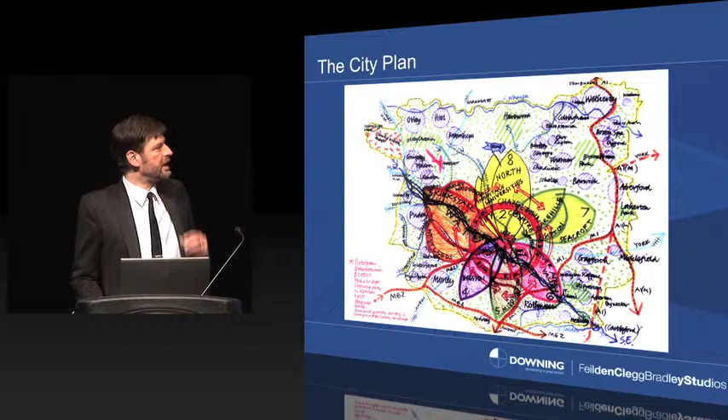This is the site for Broadcasting Place, and I think the title of this talk is about changing context for tall buildings. This is a very specific listed and conservation area context on the edge of the city centre in Leeds, which is a city of 750,000 people in the north of England, primarily a Victorian city. In terms of transition from the city centre to the outer edges of the city, this is a diagram done by Koetter Kim and the city architect, talking about a central ring which envelops the city, making a transition from the city centre to the outer and inner suburbs. And I think one of the things that this building tries to do is to make a jump between inner city and outer city and begin to connect them together.

This is the site itself. The university is up on the left-hand side to the north. And as you can see, this large area of urban motorway has come through and really transformed the city centre, creating a very strong barrier. Part of our project, which was to move what was a former BBC studio site on, was actually to reconnect bits of the city and use this project to combine the tall building and lower buildings around there to stitch the city together again.

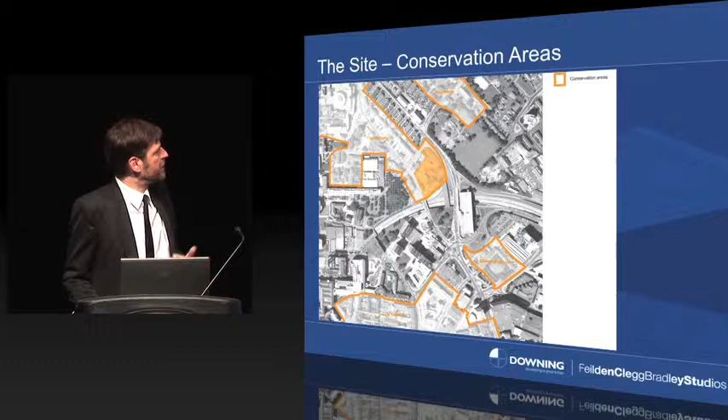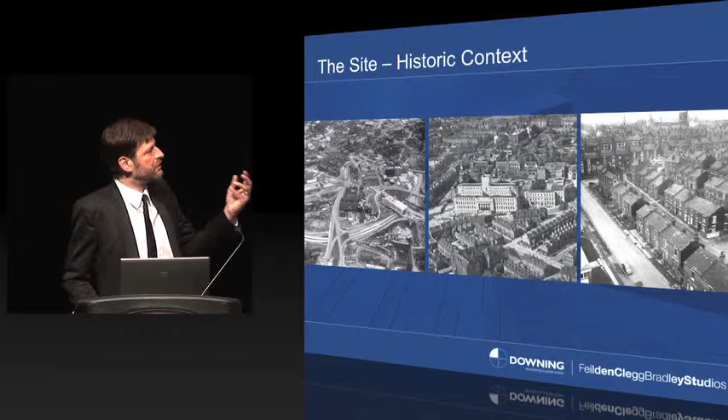The site itself shows a series of conservation areas, a very tricky site in terms of its listed building status. And as you can see, its evolution through time: the urban motorways coming through, the development of new, very striking university buildings, and a context of very dark and dense row housing from the Victorian era. And the city itself - this is the City Hall, which a group of Italian architects visited once and asked if they could find out where the black stone came from. This is also a view up the main road at Woodhouse Lane, looking towards the complete contrast, which is a white Portland stone building. So a city actually almost comprised of these quite intense, big Victorian urban buildings.

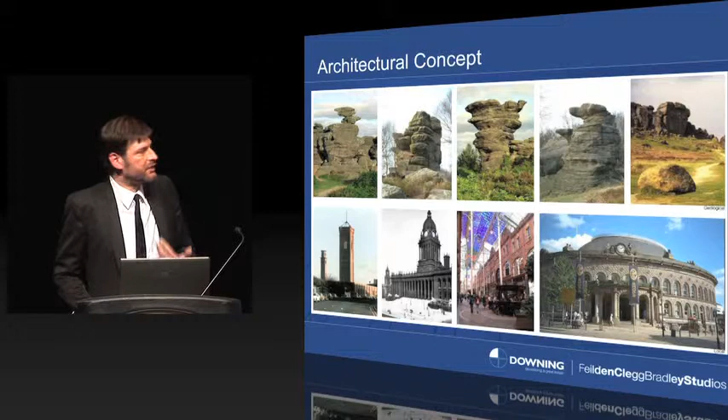Also, I think from my point of view, looking at this from a local context as a local Leeds lad, trying to bring a specificity to the building. This is some surrounding local landscape from the local hills, and also, again, this context of the Victorian architecture, where taking commercial and creating the civic was something that was very foremost in their minds. And as was mentioned earlier, this building was the site for the development of one of the first moving pictures by a French filmmaker called Louis Le Prince. And I think we were very keen to bring a sort of lightness to an otherwise very big sculptural building.

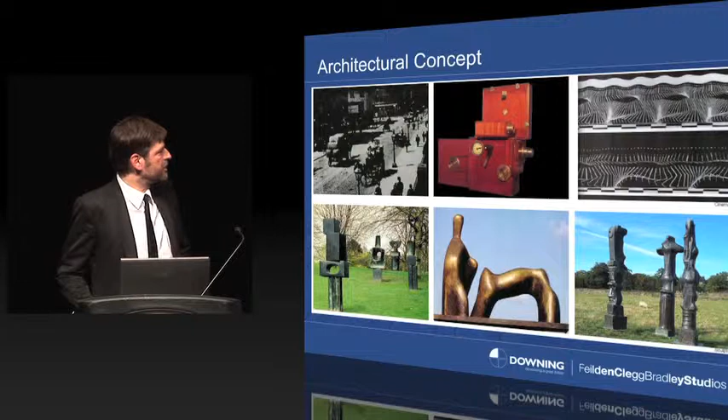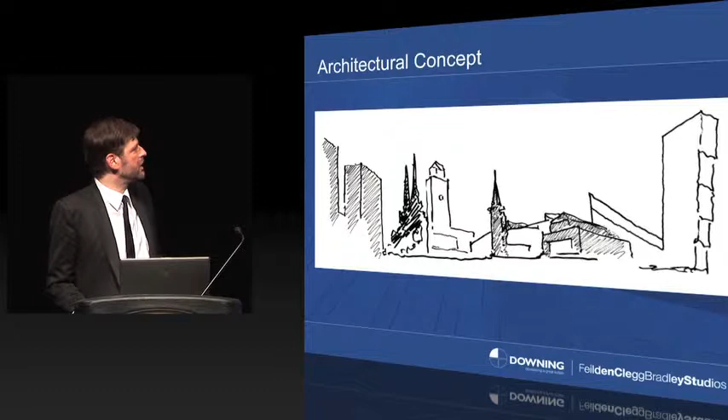Some sculptures by local artists Henry Moore and Barbara Hepworth at the base there. So just developing the basic conceptual approach, we tried to build sensitively but tall relative to these listed buildings, to preserve and frame this view that had been established up Woodhouse Lane, and to begin to bring some of those landscape metaphors into the building to create something which was almost a piece of landscape within the city itself.

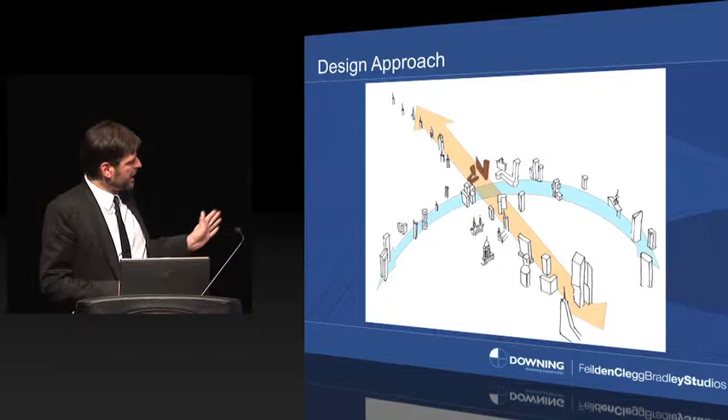This was a quick sketch to help formulate the city's tall buildings policy, where we framed our site as the nodal point at the top of a high brow hill, coming up from the centre of the city, going out towards the edge of the city with a sequence of churches, and then bringing a very large arc around the existing main urban ring road.

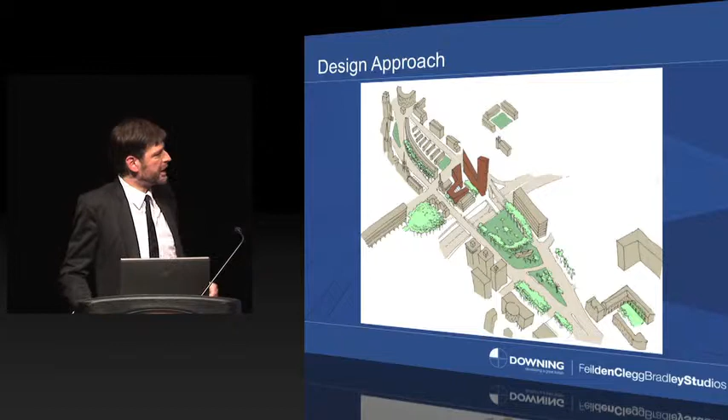But then moving closer into the site, you begin to see the setting of the building relative to open space and some of the larger urban gestures of the existing Metropolitan University and the university further up.

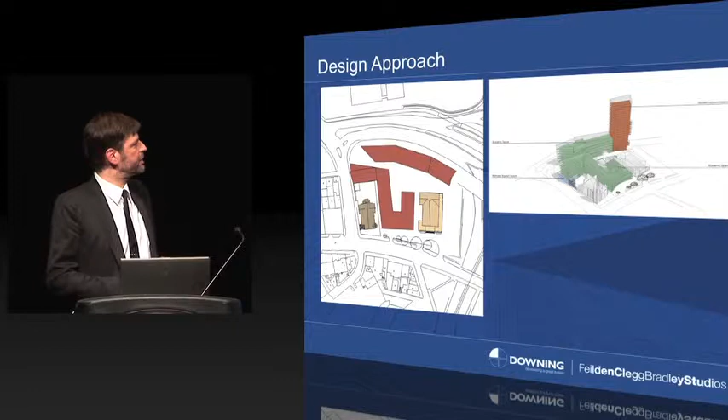Also to create a very simple and straightforward site organisation about bringing people back through a site that had been closed off for the last 40 or 50 years, and to create a sense of place, but a sense of different contrast of spatial experience, reconnecting the city together.

This was the base site plan, where you can begin to see the urban motorway to the bottom, and then a sequence of routes and courts running through between these very densely packed buildings.

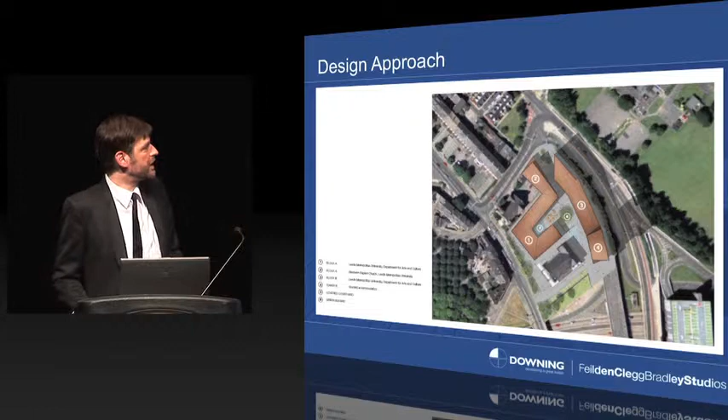The other main use on this site is actually the Faculty of Arts and Society, as Chris Bailey described in the film, and how to integrate a new arts building with student residential accommodation to create a very intense mixed-use experience. Also bringing an architectural language from the city into a residential area and an academic area to the north, and creating a building that was striking, modern and purposeful, yet at the same time quite responsive to its context.

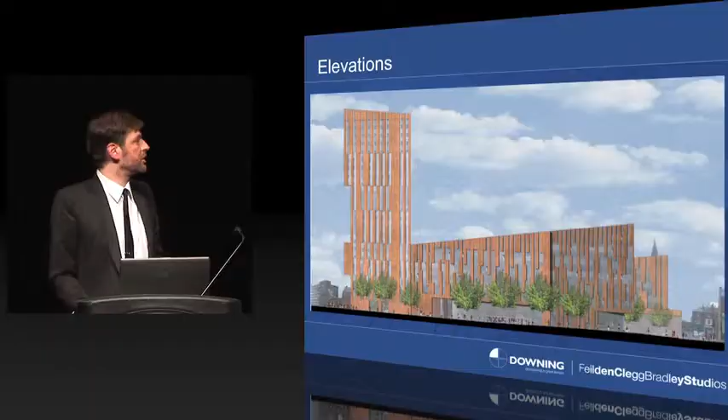This elevation shows quite well that we were establishing a strong base to the building, a very definite middle, and a raking attic top, which related to each of the facades of the buildings, but began to give a different character as you moved around the site.

So you can begin to see the variety of scales here. We're dealing with 2 or 3 storeys, lower front entrance to Woodhouse Lane, the main studio buildings raking up to the back, with the tower then facing back towards the city centre itself.

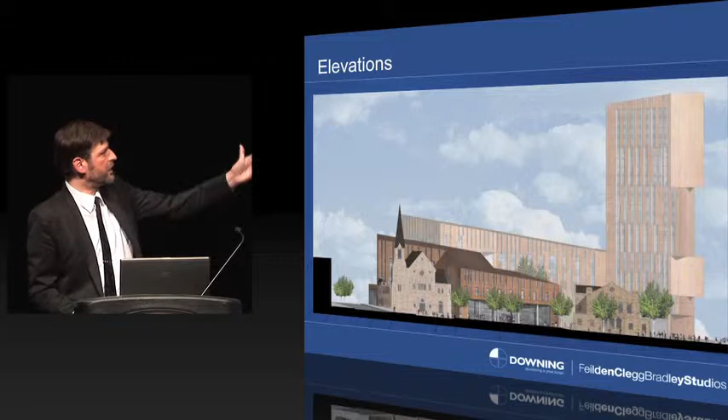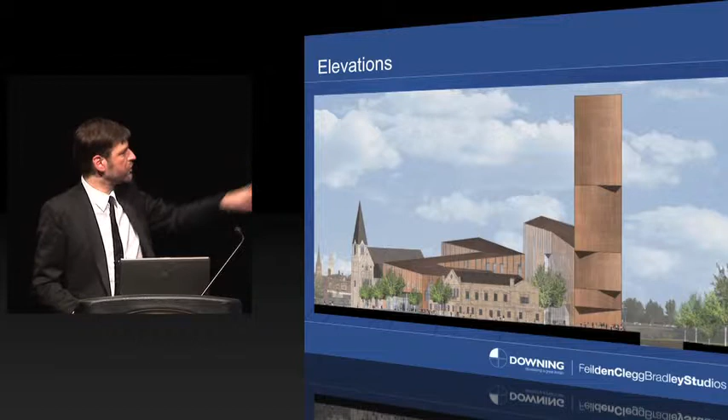The tower has a south-facing elevation which is deliberately banked to give a very sculptural effect to the building, but also establishes very strong east and west orientation for the student rooms, so they get very good quality of light. You can see the strong rakes giving it a very landscape feel and a strong movemental feel around the building itself.

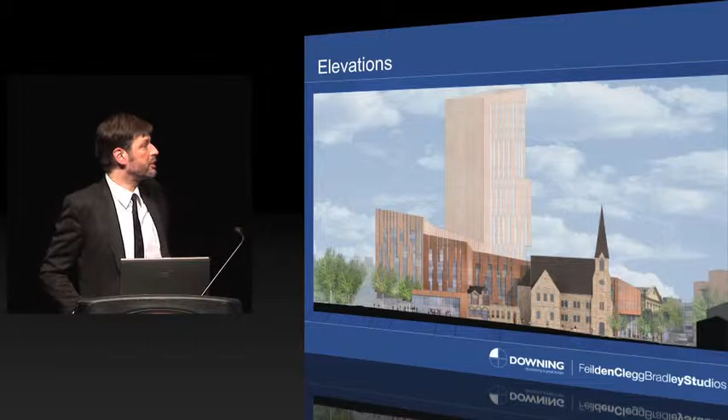The other element on the site was a Baptist church, which we also accommodated into the brief, and that's located in the large glazed section to the left there, linking also into the former Baptist church, which it ultimately replaced. There, the academic accommodation with the main cores, and the student tower to the left.

Those are the routes then running through the building. I think to give it a very future-proof feeling as a sequence of urban spaces, allowing for commercial development to come forward potentially in the future as the city expands out to the north.

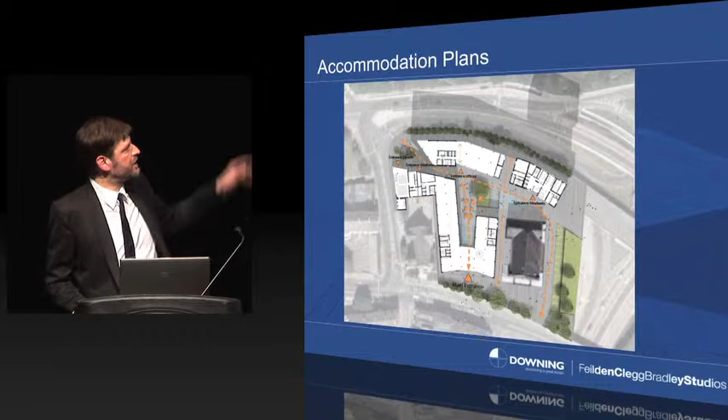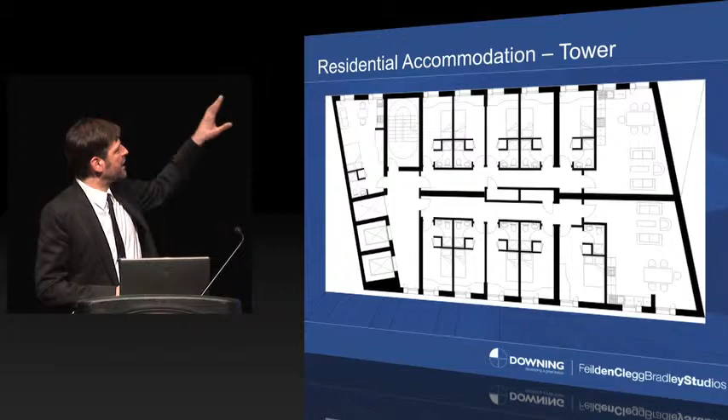Looking at the student tower itself, it was actually a very simple and straightforward build in a sense. 2 clusters of rooms with communal facilities, facilities for the disabled, and a large suite room to the back, double lift and single escape stair, with some very bright and straightforward accommodation, a very intimate and dense residential tower there.

And actually, in terms of the facade innovation, we modelled each of the facades through the building research establishment, so that each facade was individually modelled and evolved in terms of the daylighting requirements around each of the facades of the building, and that extends to the tower itself.

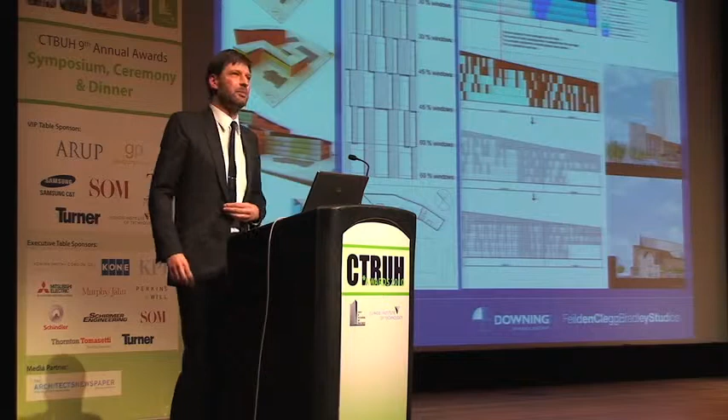And in terms of bringing some of those metaphors of filmic movement into this, this is a facade study for the ground floor where we used mirror glass to contrast with the cor-ten steel, which is the main body of the overall facade cladding.

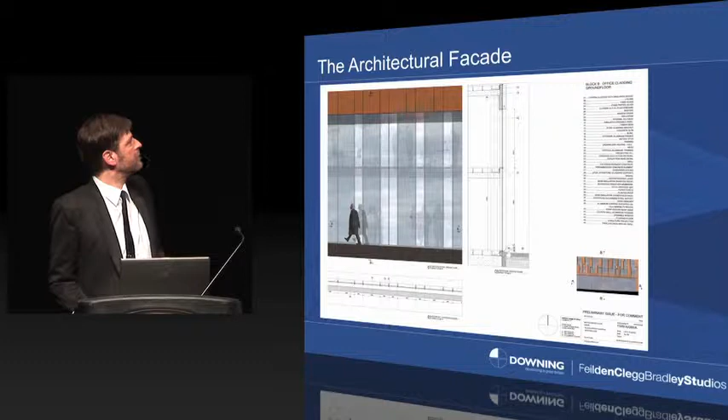And also to begin to change the facade as it comes around the building, to allow elements to disappear into the sky, to break down the mass of the building overall, which is big in its context, but not big in the context of the skyscrapers we've been talking about today.

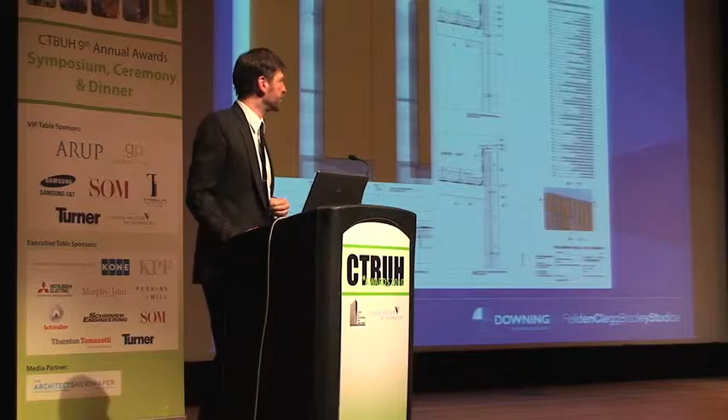There's a banner down at the bottom here with a spread of the whole skyline of all the tall buildings being considered. Our building is actually concealed by one of the eyelets punched in the bottom of the building there. We are 69 metres high, which is 11 times shorter than the Burj, which will follow us next. So we're tall relatively speaking, but we're punching above our weight today a little bit, I think.

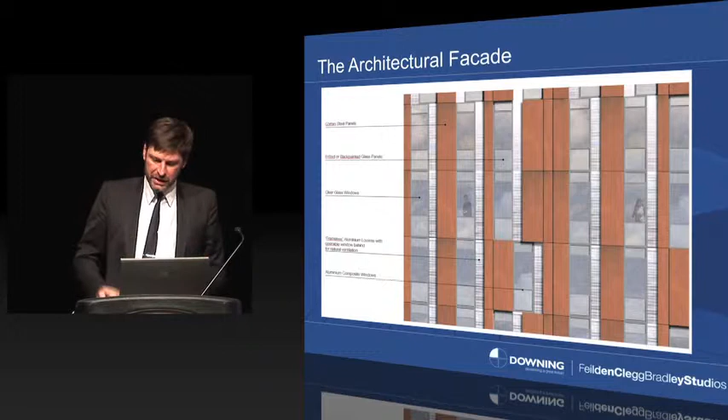So just some further facade studies, really showing how we tried to break up the mass of the building relative to environmental studies, to provide a bit of variety as you move around the building itself.

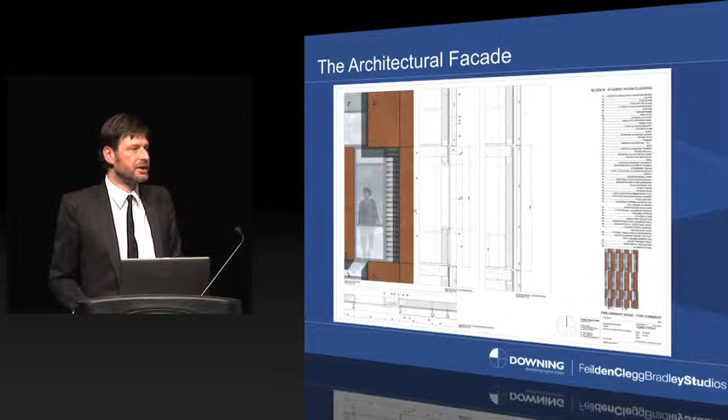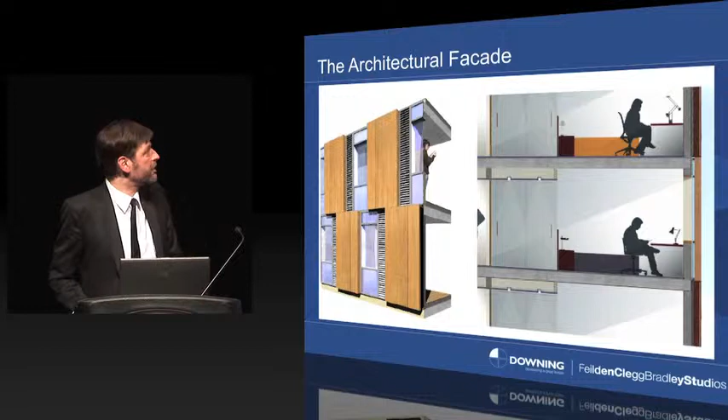And then going down into the student tower, which is naturally ventilated, highly insulated, but very simply constructed. These are some of the facade studies we carried out just to get this building working with the environmental people, with English Heritage and various other people we had to deal with on the facade.

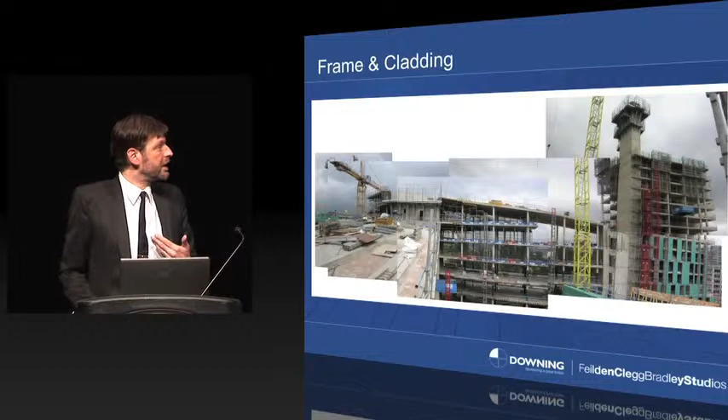So this is really just a couple of site pictures to show, as the building evolved, a very simple concrete frame, simple infill panels and cor-ten cladding over the top of that.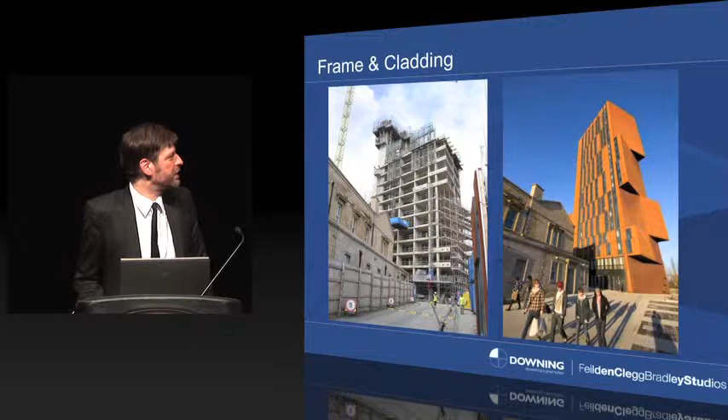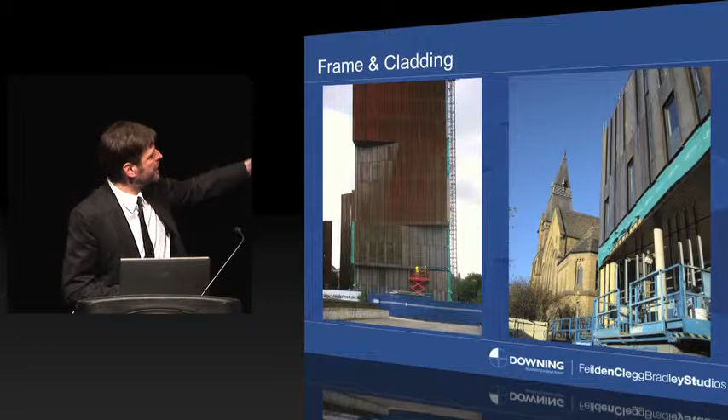And I think in terms of the cladding, which has been one of the most controversial aspects of the building, this is the cladding as it went up - dark, sort of miserable grey colour, but very quickly it became animated, and as you can see, as the guys worked their way down the tower there in terms of the scale, the rust followed them as they walked and worked down the tower.

And I'd just like to finish by taking you on a little walking tour through the different aspects of this building, because I think one of the things we've tried to do here is to provide a very specific building to Leeds.

And I think the other thing about this building is it responds very immediately to all of its local contexts. So it tries to provide a very strong presence on the skyline, but at the same time it provides intimacy relative to the more sensitive conservation areas.

I think one of the things I personally wanted to try and do in Leeds was to bring something a bit bold and a bit new to the city, which had, to be quite honest, been quite staid in its architectural debate for a long time.

And one of the things I was adamant about was that the front elevation of this building would actually remain blank. It would provide a very enigmatic facade relative to the city, relating to these larger Victorian buildings which themselves had no windows in. And this has become the sort of emblem of the building in a sense.

And I think that was the thing - the stacking of those main elevations was to try and provide mass on the sky where you could see it. But as you approach the building, which appears in various different contexts and guises as you move around the city, it gives you a little bit of a different flavour of itself.

And this is as you approach more closely with the large green space to the south, still giving very little away of itself. And as you get gradually closer, the building sort of opens up and reveals itself to you.

Coming up to the main feature of the building, I suppose, is this sort of spiralling towered mass, and the way the daylighting study influenced the orientation of the windows, which have louvered panels allowing for natural ventilation but also preventing unruly students from throwing things out during the evenings when they've had too much to drink.

And this is the wider central space in the middle of the plot, which now has a number of large trees in it. This provides a major route through, allowing you to walk through this part of Leeds without coming into contact with the freeway—a completely new urban experience which connects into the residential and academic neighbourhoods to the north.

There are also elements of previous buildings that we've built into Broadcasting Place. This is the previous facade of the BBC Studios, which was demolished as part of this job, and we saved this frieze and built it into the corner of the building. There are also a number of artworks and other pieces built into the wider context of this building.

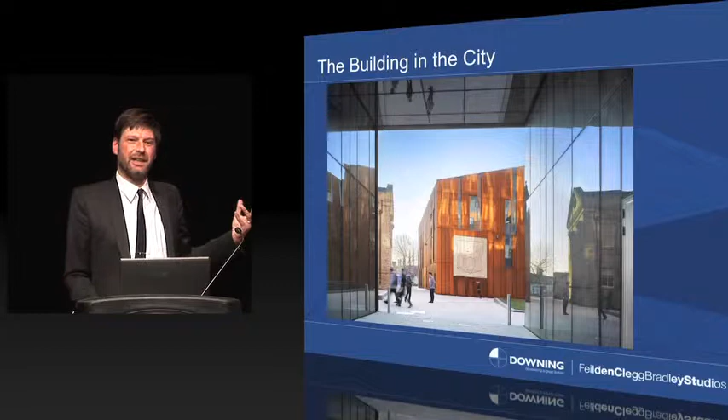This is one of the routes beneath the tower, which allows for future connectivity as the city expands. And to my amazement, we still managed to build this in mirrored glass, so you can walk in here and it's a bit like a fun fair at ground level, which is a complete contrast to the cor-ten building itself.

Again, in the context of the surrounding churches with their main stone facades, the building provides this ever-changing setting as you move around it at the lower levels.

And then related to the row houses further to the north, there's this sweeping arc—about a 300-metre long elevation of these row houses—with the building sitting in the context of that.

And as you move round, there are some very, very sharp corners on some of these blocks as they rake up towards the north. You could have somebody's eye out with those if you're not careful.

And then another one of these ginnels working its way down here, where you can see the reflectivity of those lower levels guiding you through, and the tower facing back to the city in the corner.

And the tower at night.

I almost wanted to conclude on one last point, which is one of the wonderful things about building in your own home city is that you really feel the criticism.

I think the other thing about this was that it was the first project I'd worked on, and that we as a practice had worked on, that was really internet active. There were websites about this, all kinds of debate and discussion, and it polarised opinion—but in the most productive and fantastic way. I really couldn't have imagined that people would care so much all of a sudden about their opinion of this rusty building.